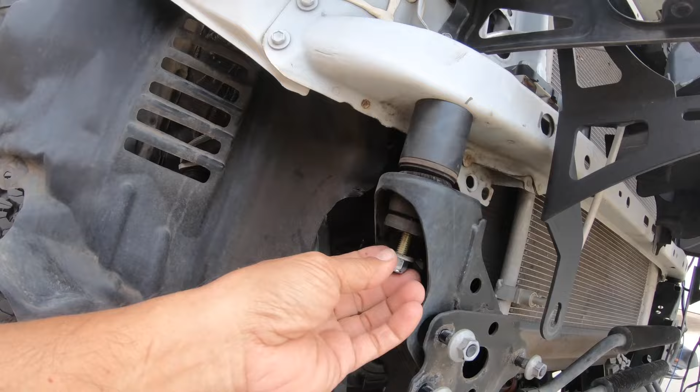I came up with the idea that I want to change all the bolts out. The company gives you grade 8 hardware, great, except they have a manufacturing defect, like I showed you guys, that the 2 bolts for the front radiator core support is wrong. But good thing Daryl had extra grade 8 bolts that he always has on stock because he knew about these problems, which he didn't tell me. So that's the grade 8 bolts right there.

I want to at least do a grade 10 or 12. Grade 8 has about 150,000 tensile strength. I wanted something that's a little higher, because my life depends on it, the people riding in this truck depend on it, my family depends on it. So to have them die because I did something stupid like grab a bolt from City Mill or Home Depot or Lowe's, you gotta be an idiot. I'm sorry, but they do have grade 8 bolts that the hardware comes with. So I don't know what I'm gonna do. I'm gonna run down to City Mill, Home Depot, Lowe's, see if I can find minimum grade 8, 10, or 12. And like I said, I'll put some pictures just for reference so you guys can see what you're actually getting.

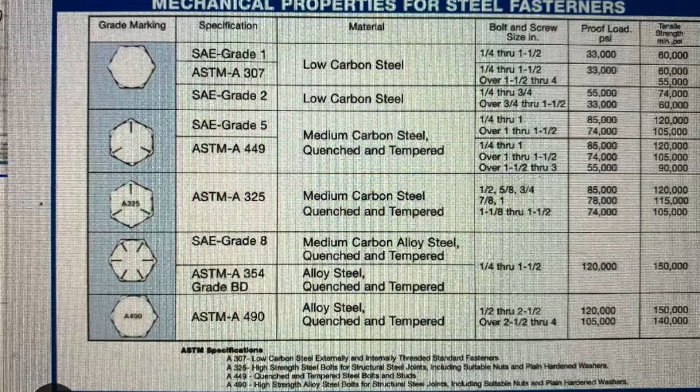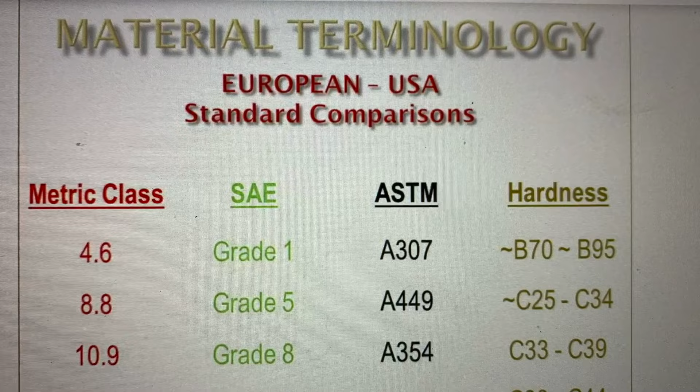So I'll get started on this project now. Let me see where I left off. I'm not too sure, let me check and I'll be right back.

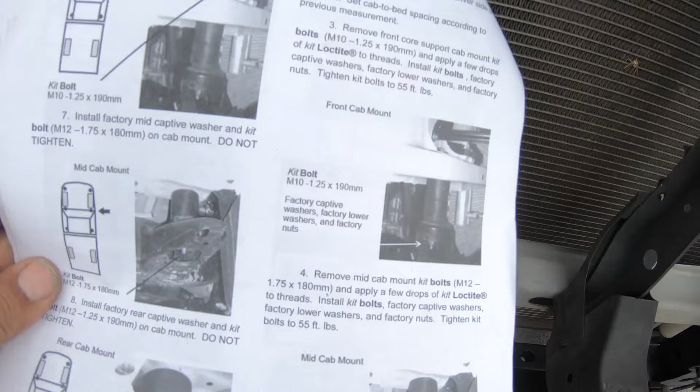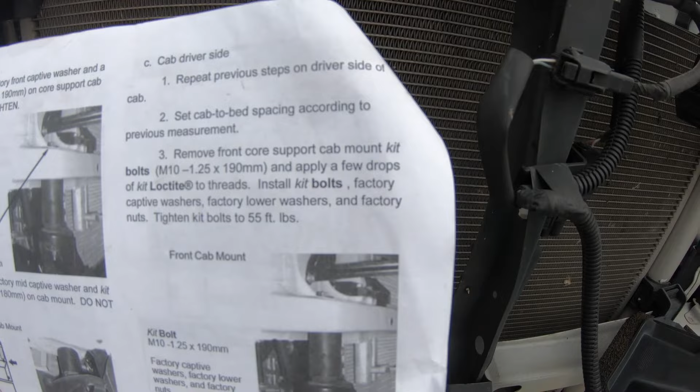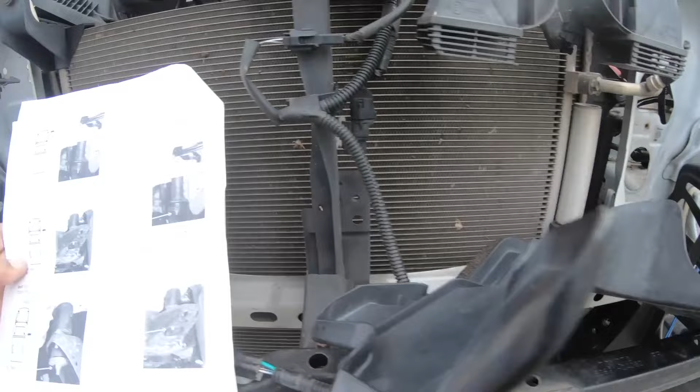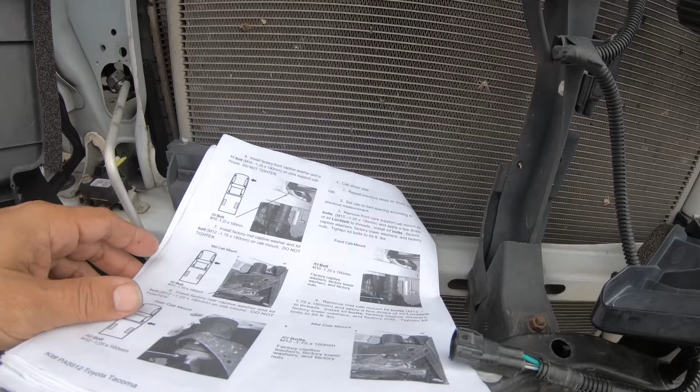Okay, so here's where I left off. This was the passenger side. Basically, you put all the bolts back in, do not tighten it. So this is the passenger side. Now we need to repeat on the driver's side. So I'll take out the bolts from the driver's side - the core support side, that's here, the middle of the cab by the driver's door, and the rear of the cab by the passenger door. So let me do all that, and I'll show you guys exactly how I grinded and pounded out those bolts, because that's probably worth knowing.

Okay, so let me undo everything and I'll be back to show you guys how I grinded out those bolts. One more thing, before I start the driver's side, I made sure that the steering wheel was tied off, and I'll show you guys what I mean by that.

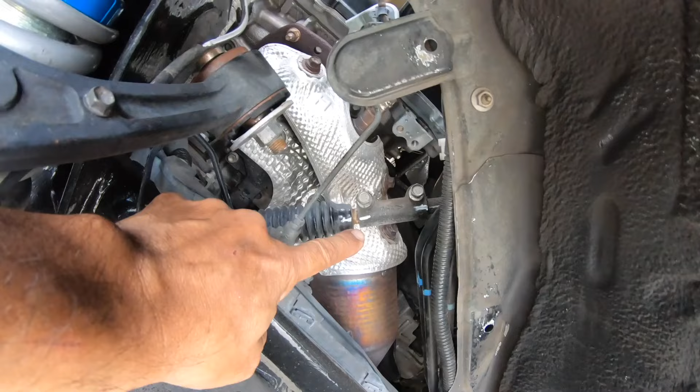See this? By doing that, when I lift the driver's side, you're gonna stretch the steering column, so I had to loosen the 2 bolts - those 2 guys right there. The reason they tell you to do the passenger side first is that when you lift the passenger side, the angle is gonna be like this. And then when you lift the driver's side, it should come relatively level, allowing for a straighter vantage point to take off that piece and insert the new spacer that it comes with for the steering. So that's the reason for that.

Now that my steering wheel is tied off and the plane flies over - that is so irritating, every 10-15 minutes, damn. Anyway...

So now I can start taking off the driver's side. Okay, steering wheel is tied off. Loosen all the cab mounts on the driver's side, jack it up and insert the blocks. Then I can tighten everything down, Loctite it, torque it down to 55 foot-pounds. So I'll put you guys on time lapse and you can watch that. So here's what it looks like.

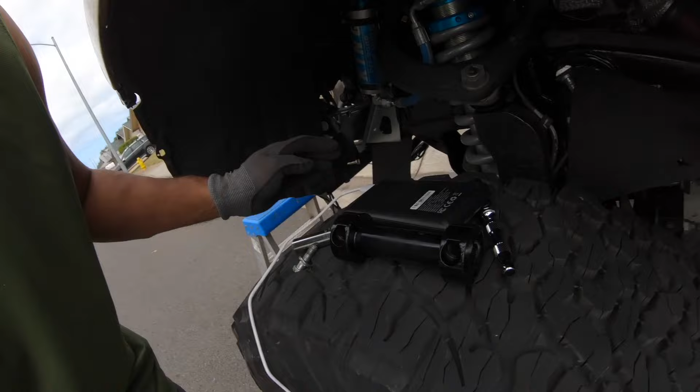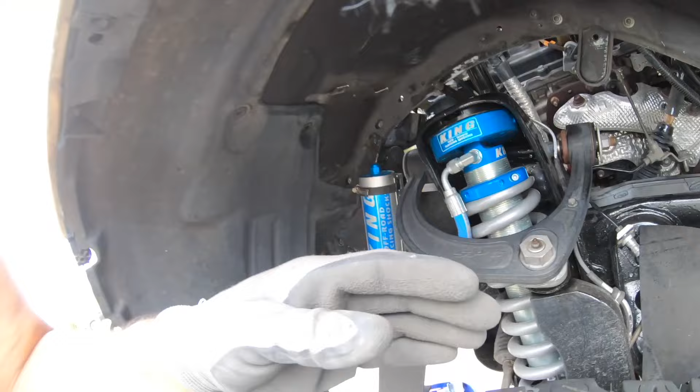All right, that was a 12mm that needed to come off. Back to time lapse.

Here's another helpful tip. If you're like me and you painted your steering shaft spacer, make sure you do not get paint in there. If you get paint in here, you're screwed. If you do, try to make sure you clean out all the threads. It's good to just run a screwdriver down every single little line in there.

And something that will really help you: take a screwdriver, the biggest one you can, put it in the slot, and pound it a little to spread it open. That'll make it easier to go in. So I'm gonna do that now.

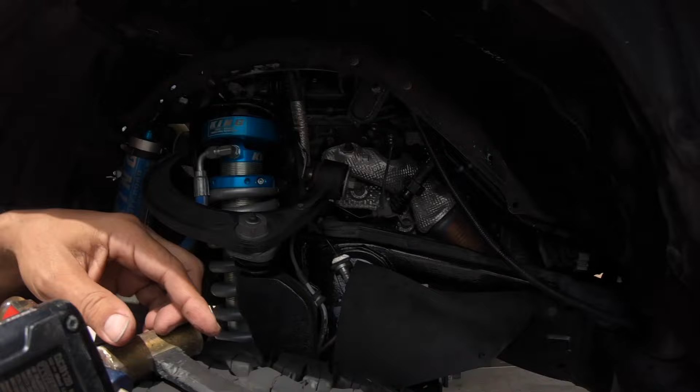I'm not gonna lie, to get that steering spacer thing in was a pain in the freaking butt. Here, this thing. Right in there.

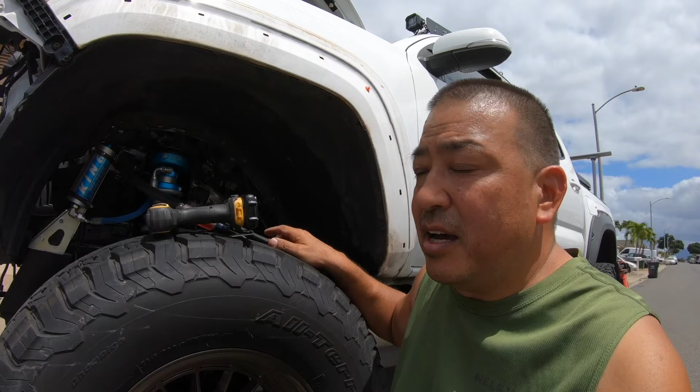The only way I could do it was to start at the top. So you try to wiggle it in after you clean out the spacer, clean it all out, put some oil on it, get it all lubed up. I got my little brass hammer, started tapping the hell out of it. Took me half an hour.

Tap that one in. Then you're gonna try to align the lower portion. Then you tap that sucker down. Then you can finally lower the body.

And now I will show you guys in real time what to do with the stock body bolts. You need to take the captive washers off. Don't just try to use your own washers—the factory ones are thick, big, and heavy, so you're gonna have to reuse those. I'll show you what I did to get it off, in real time right now.

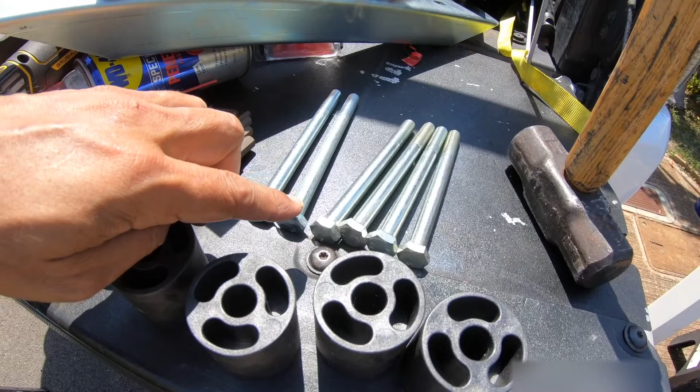So the two long ones will go in the back and two in the middle, two in the front. Just remember the two long bolts that you have remaining will go on the back. So let me loosen everything and then get started on that.

Well, I took out the 3 bolts on the passenger side. I did notice that the front one was rusted.

So when I put the new bolts on, I will be sure to use anti-seize. I'm going to anti-seize the whole bolt. That way I'll never have to worry about rust. Well, I mean, not never, but it'll help resist it totally, or a lot more.

This one does have the threaded part. So let me grind these all down and then see what's next. I think once I grind these down, I lift up the passenger side, insert the blocks, put the new bolts in, then I'm going to anti-seize all over it. So let me grind these first and I'll be back again.

Well, the bed seems a whole lot easier. I was able to just lift the bed myself, but I put a piece of 2x4 on one of the ribs. I'll show you that now.

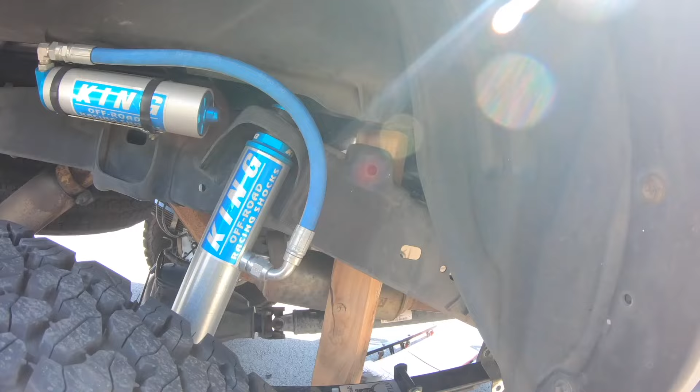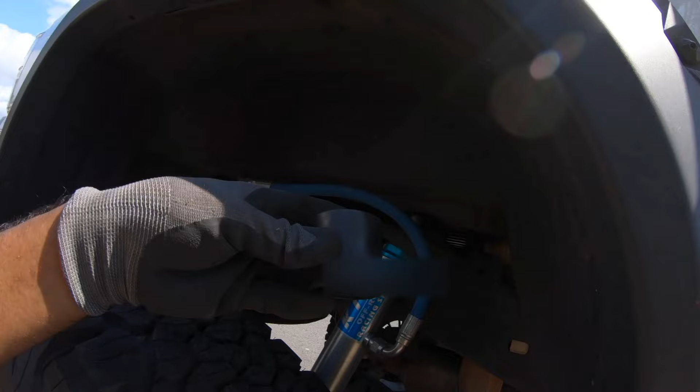So pretty much that easy. You just jack it up, stick this little spacer in between. Oh, a little more.

All right, so let me do the passenger side and then loosen the driver side, do the same thing and torque everything down and use Loctite. So let me take care of that.

I'll be right back. I'm burning already in the sun. My skin is just frying. I'll be right back.

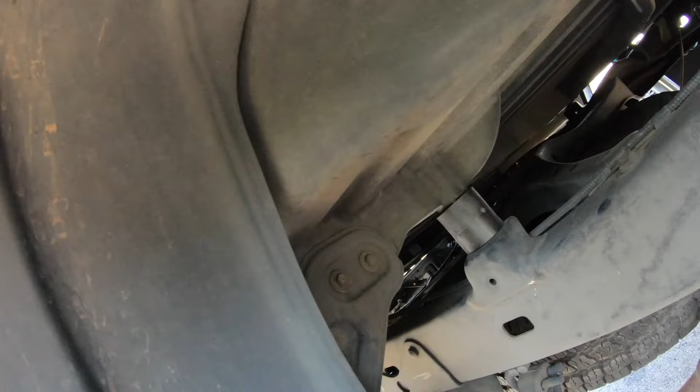All right, the passenger side is done. And I hand tightened all of them. I did not torque them down yet. They're just hand tight. Now I'll go to the driver's side.

I'm not sure if you guys can see. This is why you needed to loosen the wires.

All right, and the driver's side, I did loosen the bracket that was under here for the fuel filler neck, and you took off the gas cap.

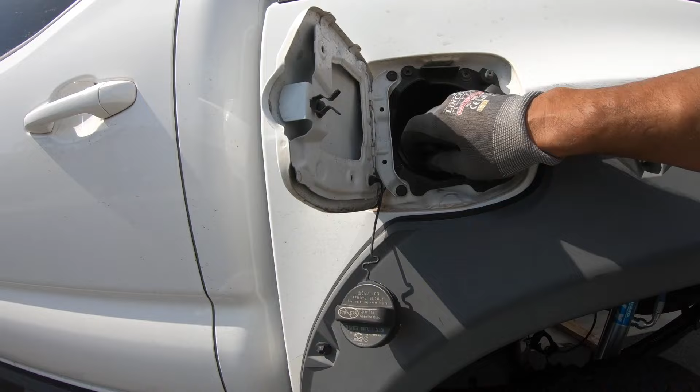I'm not sure if you guys can see, but it's under here.

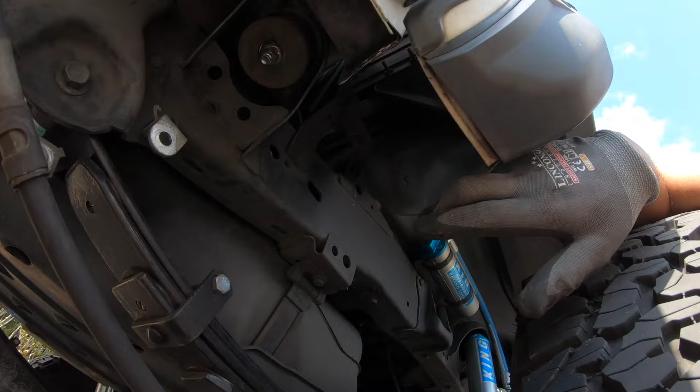Okay, so now I gotta take the bolts off from this side and then lift up the bed again with a 2x4 and put the new bolts in. So once I do that, I'll be back again.

Okay, so let's see where we're at. I'm trying to hide from the wind because it is stupid windy today, it's so ridiculous. Here we go, page 14. I'll turn the camera around.

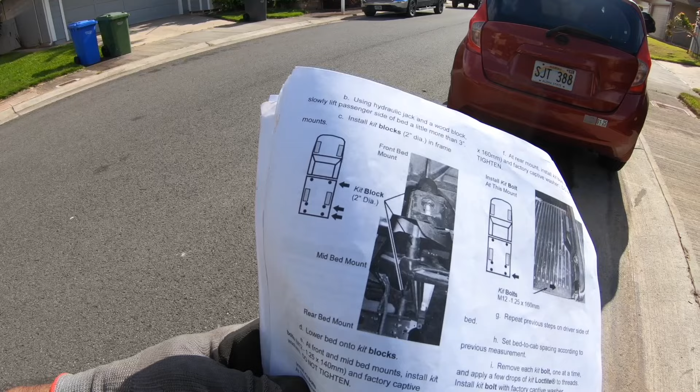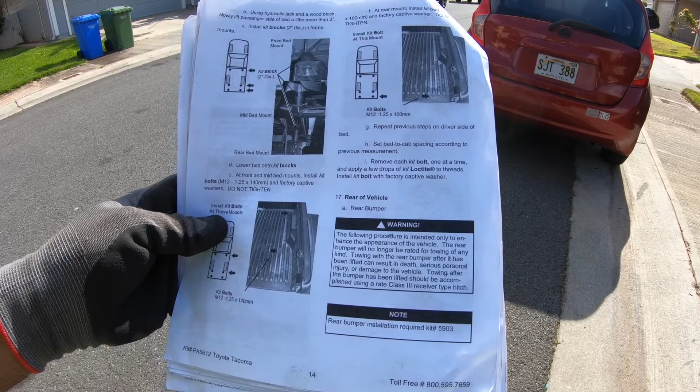Okay, so loosen the driver's side, then fully take off the passenger side, insert the spacer blocks. Then lift the driver's side, use Loctite. It doesn't give you any torque ratings, but I'm assuming it's 55 like the other side.

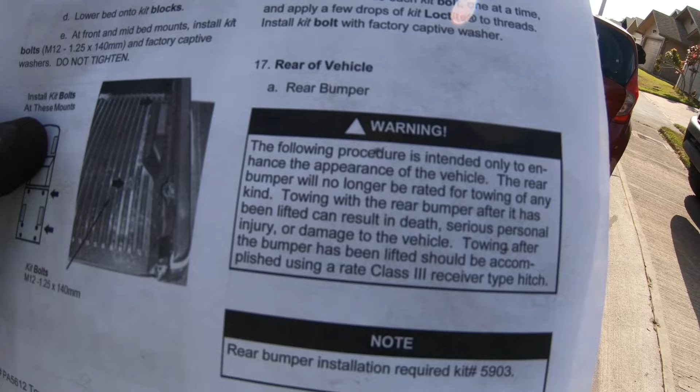Okay, so once you're done with all of that, there's a very important warning. Your bumper is no longer rated for towing of any kind. This can result in death. Wow. Okay, the next step.

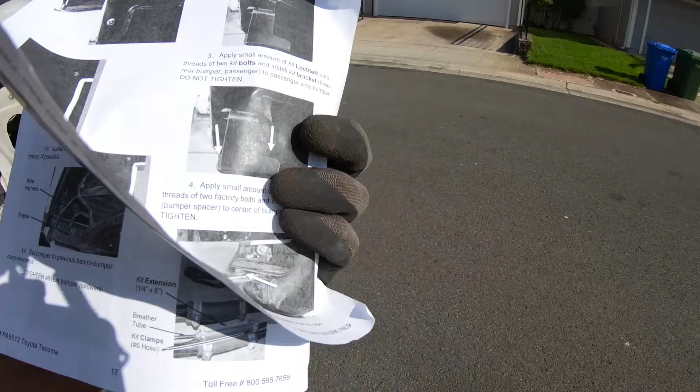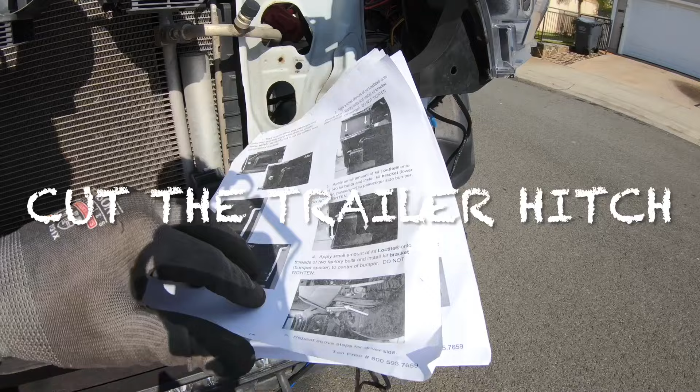So they tell you to take off the bumper cover and start cutting the bumper. Cut the bumper here, cut the bumper there, and then it's onto the fuel lines. But I'll go over what I'm gonna do differently. Oh, so let's take a look.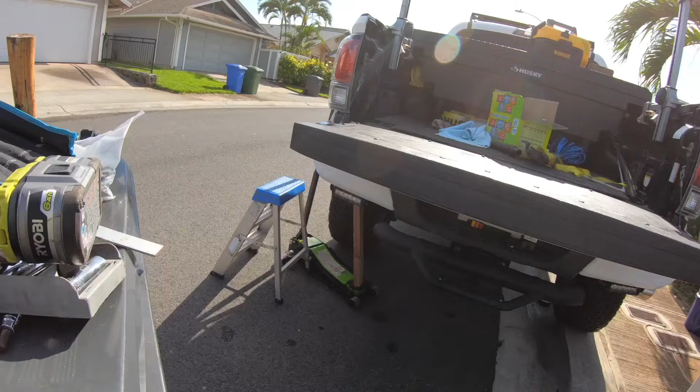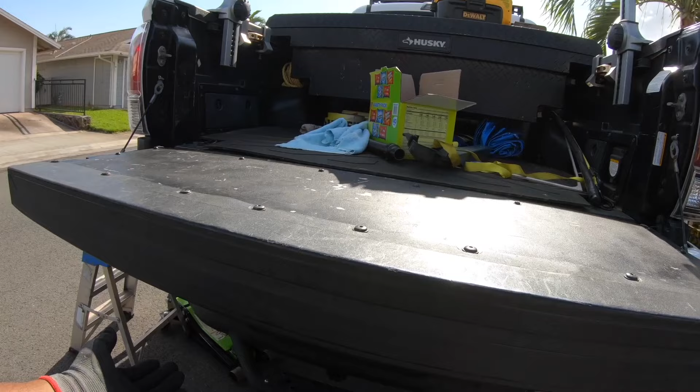So everything is done. The gaps are nice, I'm happy with them. The doors close perfectly fine, the tailgate closes perfectly fine. Everything works perfect.

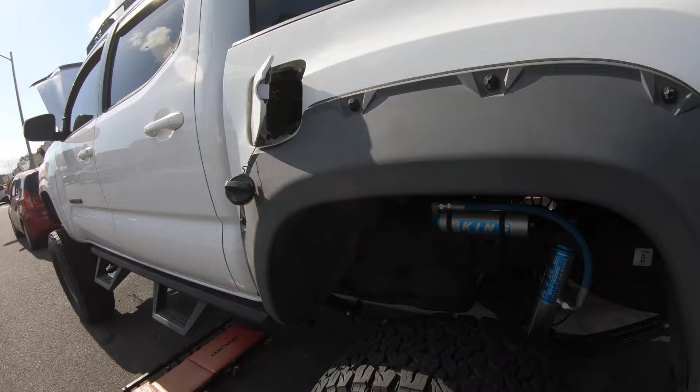It is so damn windy now. So when it comes to towing, I'm pretty much not gonna tow. It doesn't matter, the truck is a lifted truck, and it's a pain in the butt to ever tow with a lifted truck. I do have a Nissan Frontier, stock height, nice and low, a lot of power, nothing's wrong, so I'll use that to tow if I ever do tow again. In that case, I could care less.

Now, the kit leaves the tow hitch where it's at now. For aesthetics, you're supposed to disassemble everything and it raises the bumper itself, then leaves a 2-inch gap between the bottom of the bumper and the tow hitch. So what I'm gonna do, because I do not tow, is take off the 6 bolts on each side, 3 bolts each, 4 bolts, whatever. I'm gonna unbolt the bumper with the tow hitch, lift the whole tow hitch up, mark it, drill the holes, and bolt it back in with grade 8 nuts and bolts. So that's my plan for this part.

Now I think the instructions say to start putting all the bracketry in order for the radiator, the fan shroud, all the brake lines, all the fuel lines. So let me see what's on the next agenda for now.

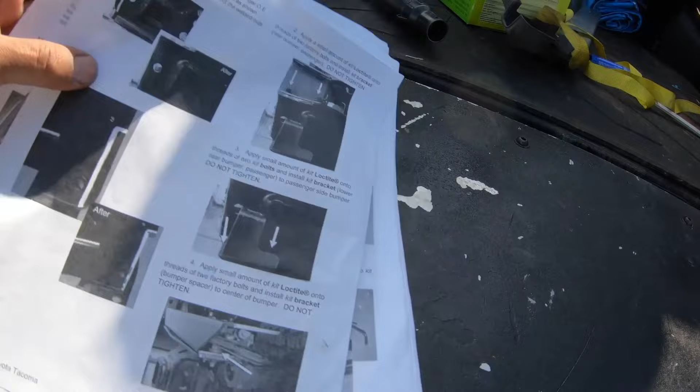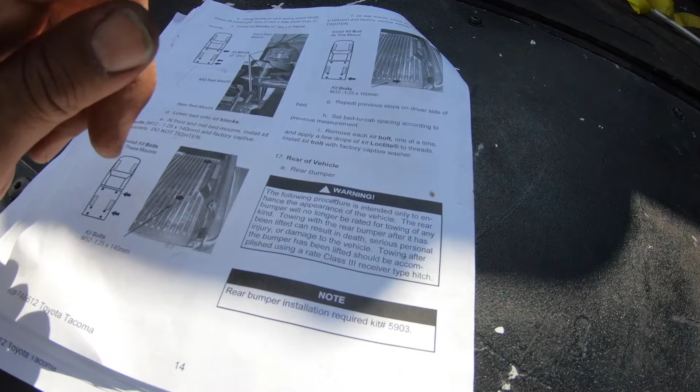So I left off here. This is the very last part where it says to bolt everything down, use Loctite, torque it, whatever. This is their disclaimer saying that you will die if you use this to tow something.

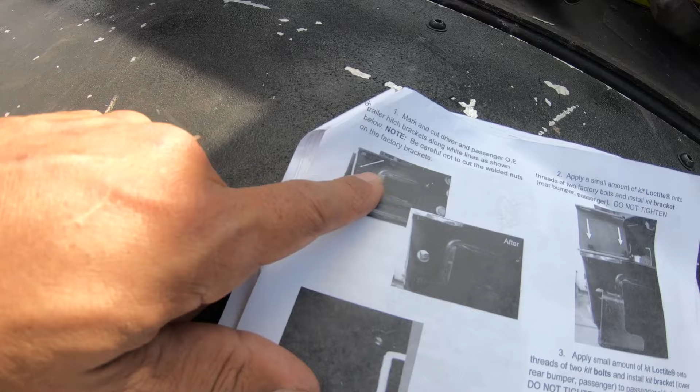Next, you would have disassembled the whole bumper. These are the markings where you would cut the bumper, and cut the tow hitch, but I'm not gonna cut the tow hitch. Instead, we're skipping all that.

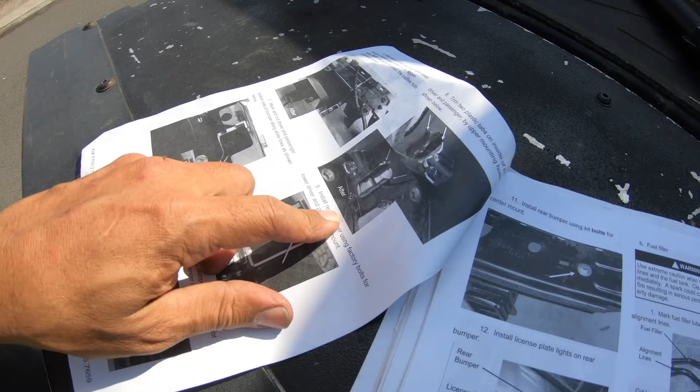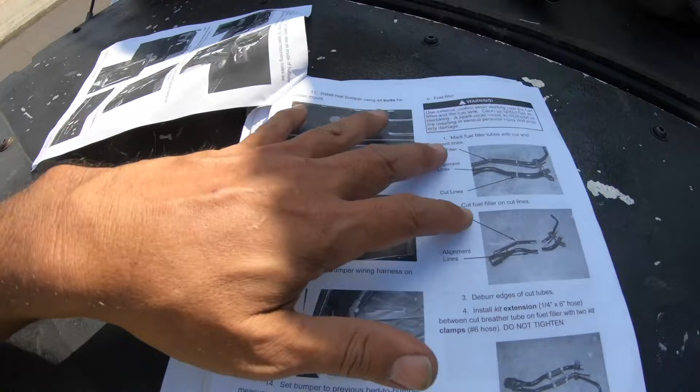What is this? Oh, more cutting of the bumper. Nope. Oh, stupid wind. The brake lights, nope.

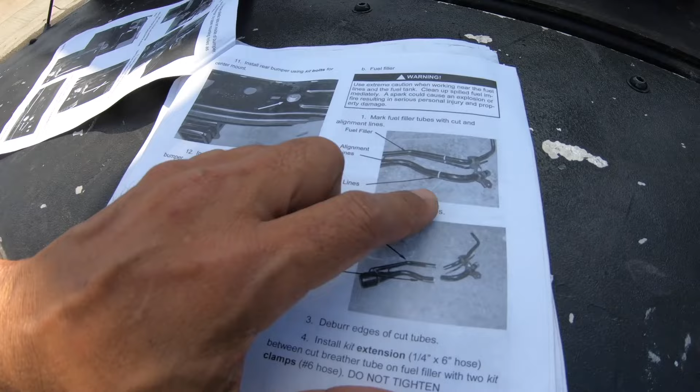Wires, okay, I did all the wiring harnesses. Okay, now is the second. God damn wind, shit.

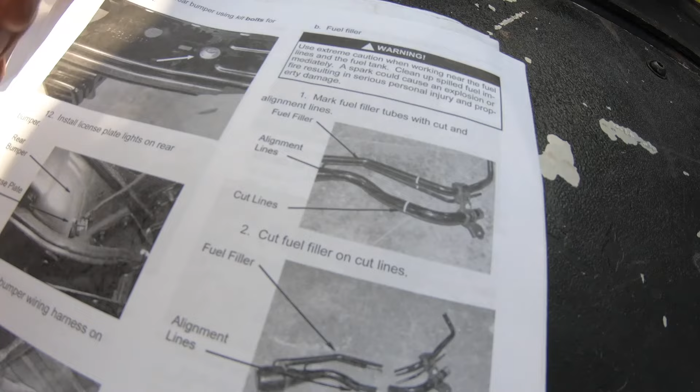Okay, this is where you would have taken off the fuel filler lines, and the wind is stupid crazy. Hopefully you guys can hear and it's not too crazy windy.

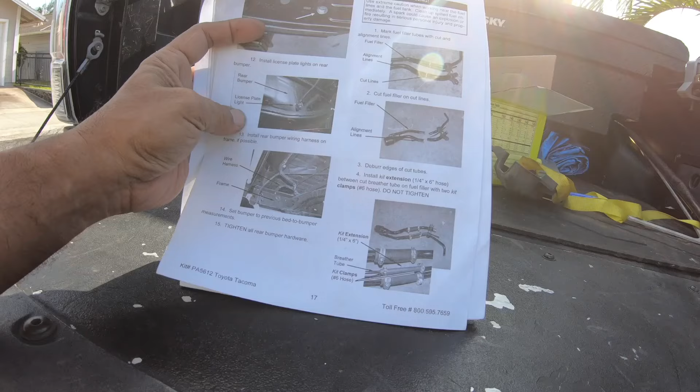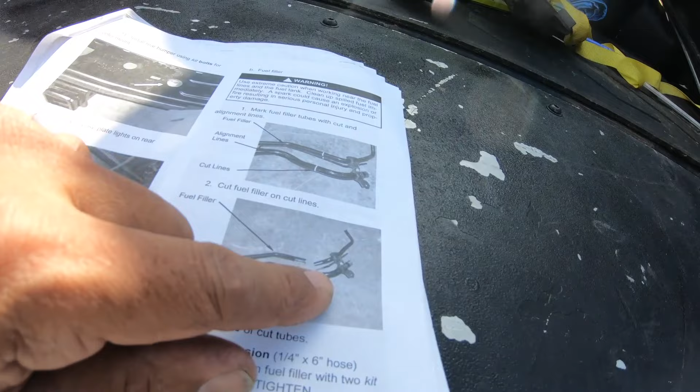So damn it, okay, so I am not going to cut. Like I said, I did release that little bracket right here. I did release that bracket, and I will fab up my own using one of the hardware brackets that I'm not gonna use. So you would have done the fuel filler.

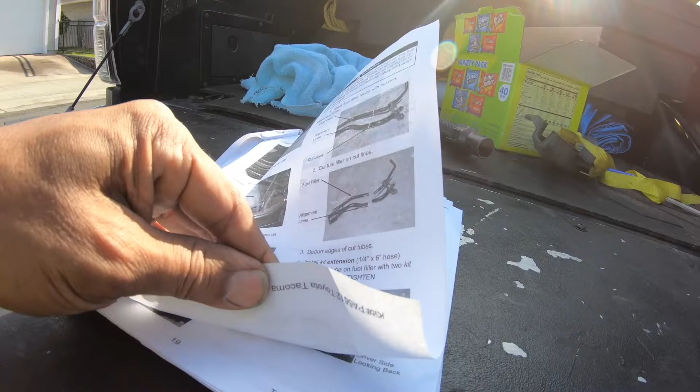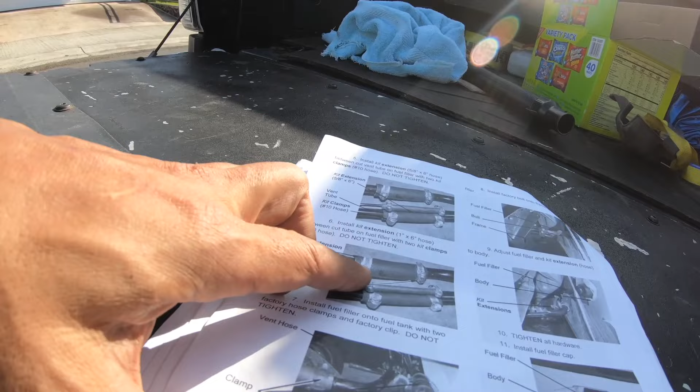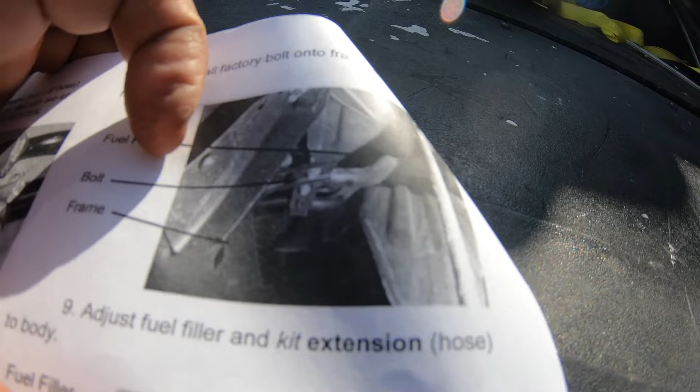God damn wind. Okay, more of that. Holes, no. Okay, so right here is the little bracket that I am now gonna make my own bracketry for. Oh my god, the freaking wind is pissing me off.

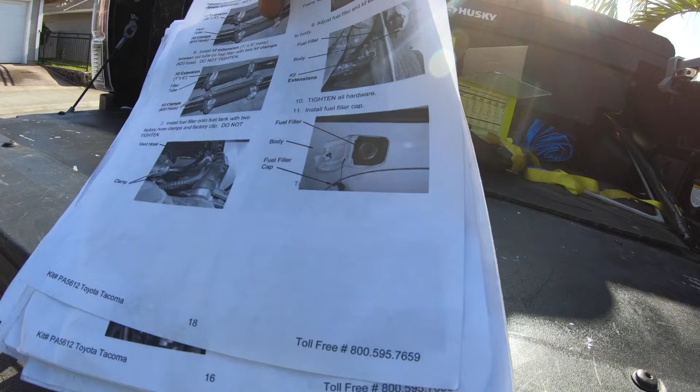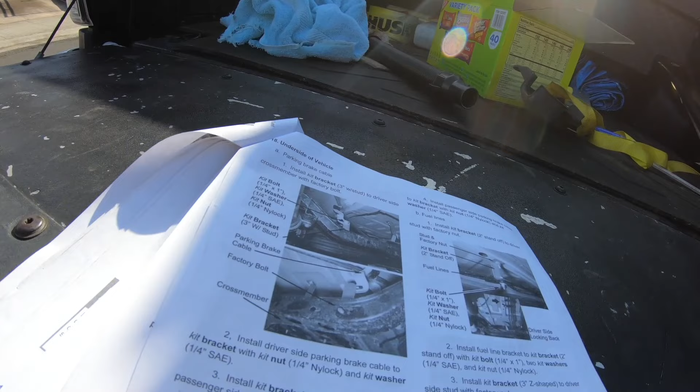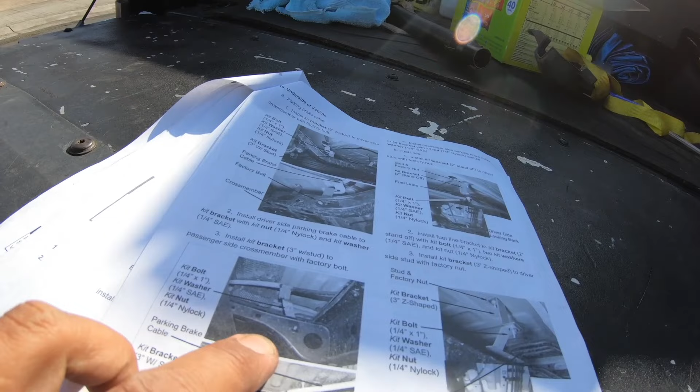Okay, so what's next? Okay, so now we start putting in all the bracketry. God damn wind. Okay, we need to put in the bracketry for all the brake lines. So this looks like the emergency brake first. Emergency brake. Fuel line, emergency brake, fuel line. Okay, I'll go through it one at a time. Let me grab everything and I'll be right back.

Okay, change of plan. Here's what I'm gonna do now. I'm done for today. I am done.